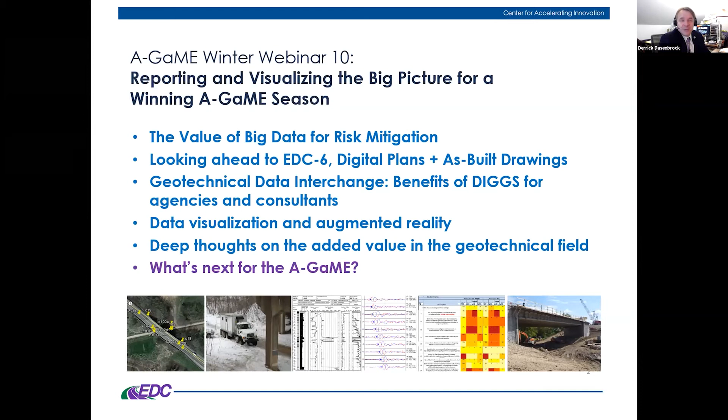Today we're going to be covering a number of interesting topics: the value of big data for risk mitigation, looking ahead to EDC-6, the Federal Highways initiative about digital plans and as-built drawings, Ohio's experience with the benefits of DIGGS for communication of geotechnical information, then a discussion of data visualization and augmented reality, and to the conclusion, some deep thoughts on added value of A-GaME technologies and other related items for us to consider and ponder as we move forward into the post-GaME season, which brings us to what's next for the A-GaME.

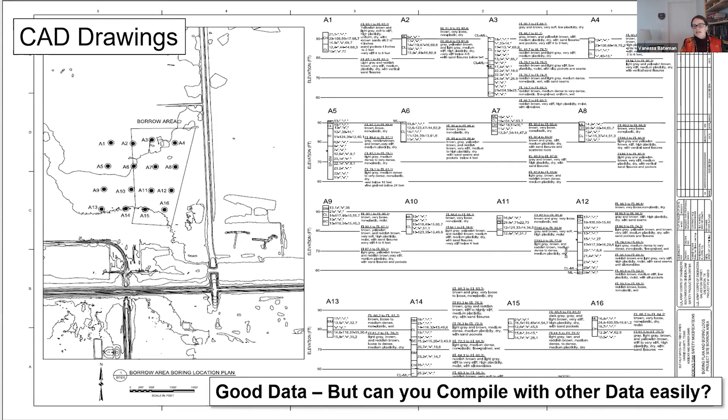So you've got a lot of good data. How can you compile it with other data? And that's one of the reasons why you need to be thinking about your data holistically and approaching this all as a whole. Just to kind of bring it home to something I know all of you have to deal with, how many borings do you have in your agency? Can you find them quickly, and how much does it cost to replace them?

Because I think what you'll find is it's a heck of a lot more expensive than you might actually originally consider. So doing things like organizing your data and having a boring log and lab database save money. It absolutely saves money. Now, it's always hard for us to get it from paper into the computer program, but what is the cost of actually not keeping this data and losing track of it?

And I know many of us have had the experience starting on a brand new project. It's a widening, it's a new bridge, it's a modification, in my case, to a lot of projects to a dam. The experience of not being able to find borings that you knew were there, right? That's a big risk to your project, and it's a financial risk to your project. You're not as responsive. You're not able to actually do some of the things that you need to do.

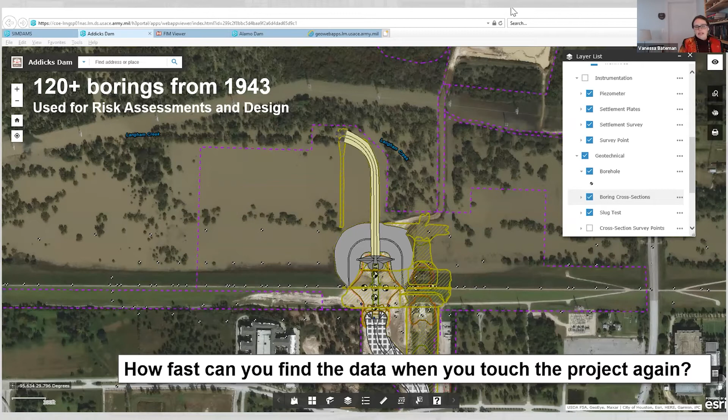And so just a quick example for replacement cost. This particular project, just the borings shown on this screen, it's not even all the borings on this project. If we were to have to replace all of the 120 plus borings shown on this screen that we drilled from 1943 to 1977, it would cost somewhere in the neighborhood of $495,900. That is a lot more money than you might think.

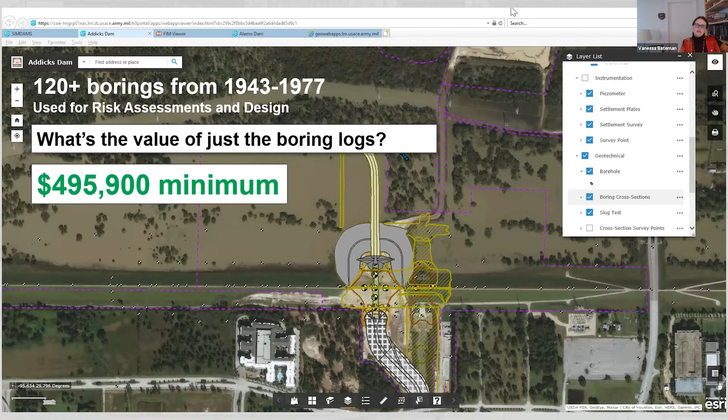Okay, so that's a dam, and you're thinking, oh, well, we may be from a transportation agency or whatnot. You guys do a whole lot of work on one of these individual projects. But so how many bridge foundations do you have within your state? If you're from an AE firm, how many bridge projects do you work on year after year? How many times do we widen these projects, and what's the condition of these foundations? This can be critical and really important information to have together before we get into a project.

Did you want to have to go redo all of that work again, right? We want to be able to get all of the data we have, bring it together, put it together with our design in our design process, because, right, how much time are we going to add to widening projects replacing data that maybe we already had?

One of the most key things you can do when working on data management and dealing with some of the data issues we have on our projects is simply organizing yourself, figuring out where you've put everything, and being able to put it into a system where you can make it work effectively for you.

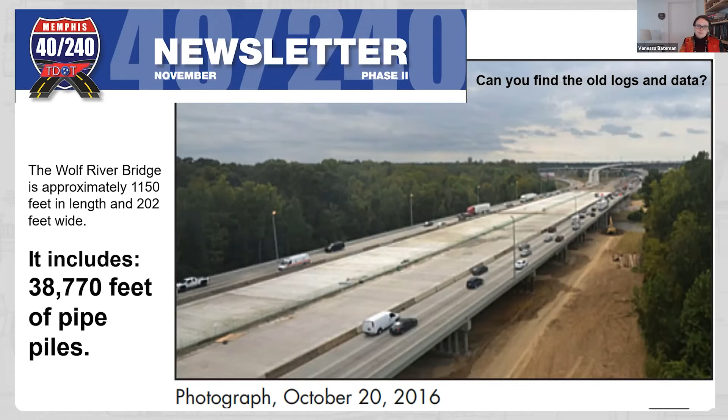And if you want to do a risk assessment of a project, it's always the same rule we use with computers, right? Garbage in, garbage out. If you don't have good data to back up your assertions, you're not necessarily going to have the best conclusions.

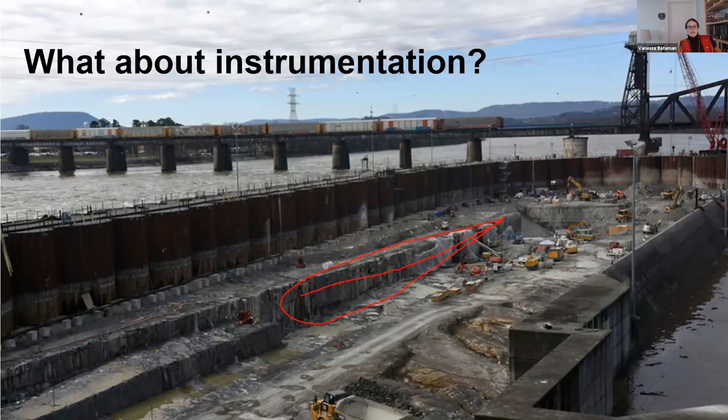Again, how fast can you get that instrumentation data in the middle of construction? As you can see, as this project has progressed, here's the actual rock wall, here is the cofferdam, we've got people standing right here. So this is not a situation, in terms of financial risk or life safety risk, where you want to have slowdowns in getting to your data.

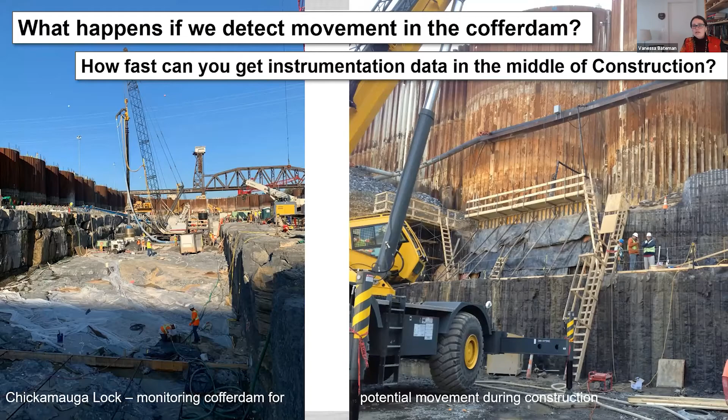The other question is, how fast can you check all of that against problematic geology or other construction data? It's all well and good just to have the instrumentation or just the boring logs, but can you correlate what's going on with your project with all of these things?

What we found on a number of ours is that we've needed to do that. We've got a lot of pieces and parts, a lot of things going on. We've got geology that may present specific kinds of risk. We've designed against those risks, we monitor against those risks. But if you do either of those things, you also need to make sure that when you're monitoring against those risks, everybody is actually getting the information communicated back out to them as well.

And I can tell you from experience, when something happens, even when it's small, you can really get people's attention anytime we're involving issues that incorporate life safety.

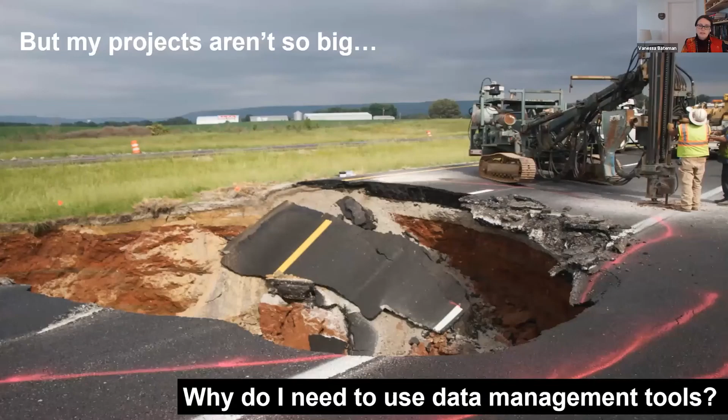Okay, so that's a lot. My projects aren't that big—why do I need to use all these data management tools? This is one of my projects from quite a while ago, a sinkhole in the middle of I-24.

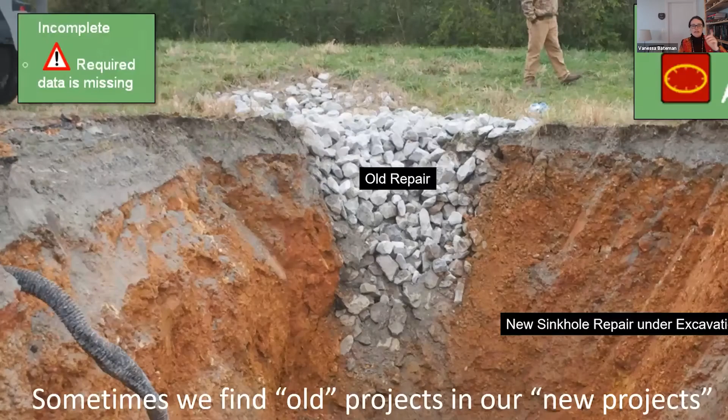Well, here's a picture of another one, and this is why. How many of you have found an old project inside a new project, gone out to do a sinkhole repair, and found the old one? Did anybody have an inventory? Did we know where this was located? It's fine, we're going to make a fix, but it would have told you something about the risk of that project ahead of time if you had realized there was an old sinkhole repair there.

You don't always know ahead of time if we're not tracking these things, or if we are, it's in a file folder somewhere in the back, out near the back dock, and nobody gets into that file folder again.

From another emergency management perspective, do you have a rockfall inventory? When was the last time maintenance was done on your slope? What are the risks to the traveling public? Do you have a program where you can say we're working on what sites we can get to, making good engineering judgments?

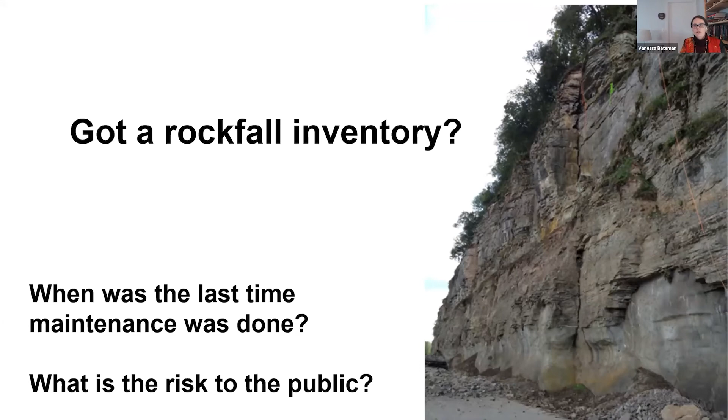Is your program defensible? If you don't have all of this stuff organized, haven't put it together, when you get into these kinds of maps, how do you pick the most effective site to repair?

This is actually the Ocoee River Gorge, the site that had the big failure in 2009. My question to you is, if you don't have this information at hand, how fast can you get that data in the event of an emergency? How do you know how quickly you need to respond to some of these things? This is the kind of information that can really help you a lot in a problem.

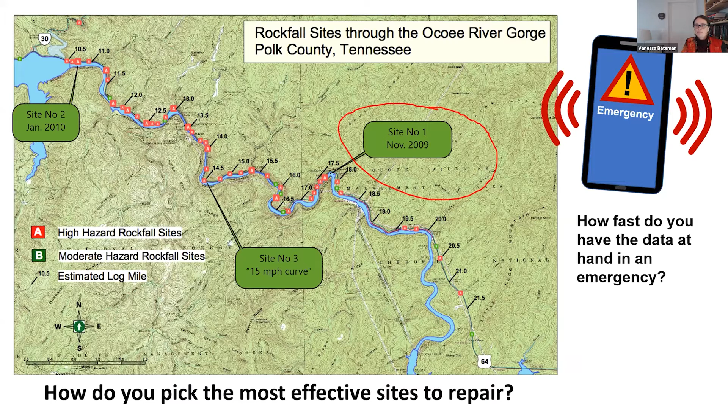Lots of our construction equipment comes with automated monitoring. Are we looking at that data? All too often, only parts of our organizations are, and this is hugely valuable information that we can use.

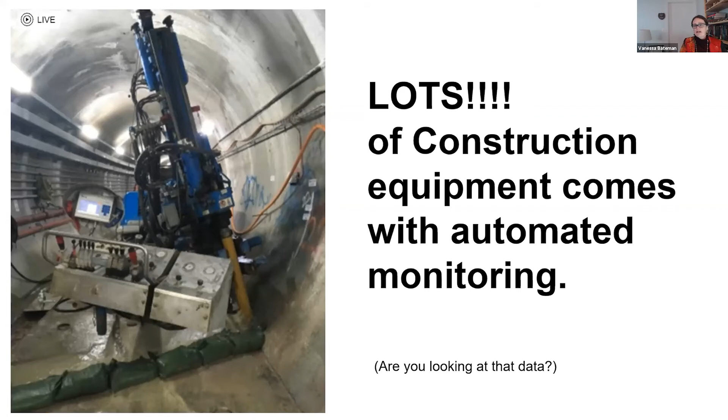Are you leveraging GIS? There's a lot of visualization tools, and Scott's going to show you some even cooler ones later in the presentation. You can do a lot with visualizing old plans.

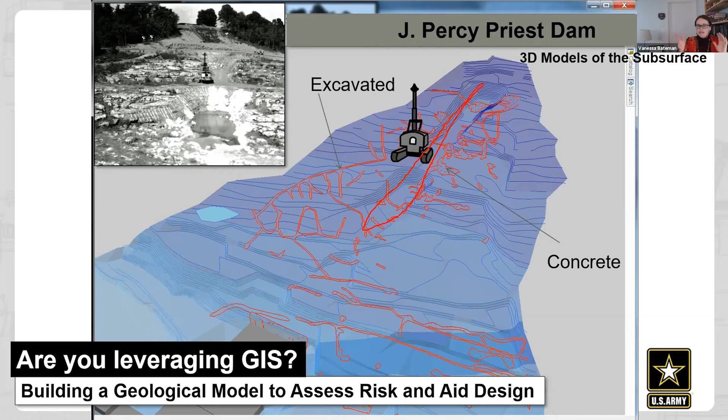Okay, so this sounds hard, right? If somebody starts talking about all this data management stuff, it's like, oh my gosh, it sounds so difficult. Well, let's talk about where we began here at the Corps of Engineers.

We really began with this in earnest at Wolf Creek Dam. It's 6 million acre feet, and we put a seepage barrier wall through the dam, 275 feet down into the karst foundation. This was a very high profile project for us, an absolute no-fail project.

This was one of the first times that we put together a really systemic data management system that we used all the way through construction. This is 980,000 square feet of a seepage barrier wall, right? This is a lot of information that we had.

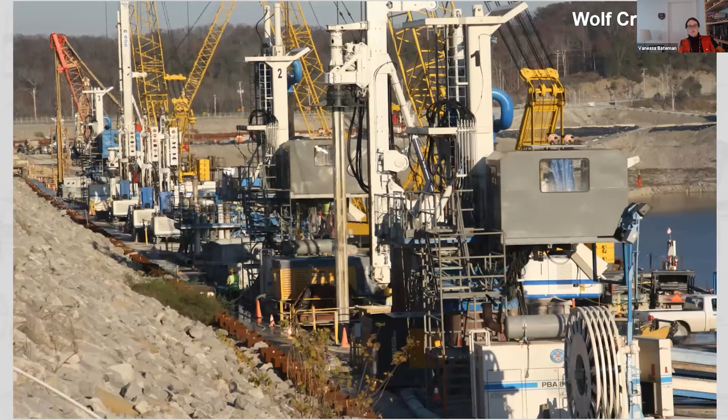Our work platform looked something like this. We had people working on a number of machines, doing a number of different things. We had instrumentation, and this is a very invasive procedure, so we wanted to make sure we were being very careful with what we were doing, and we were correlating all of the data that we got.

When we're doing this kind of thing, we need to be able to see what's going on with our instrumentation and what it means. To give you a scale, we had 71 million records on this project. If you printed out just the barrier wall reports, it would have been 144 feet high.

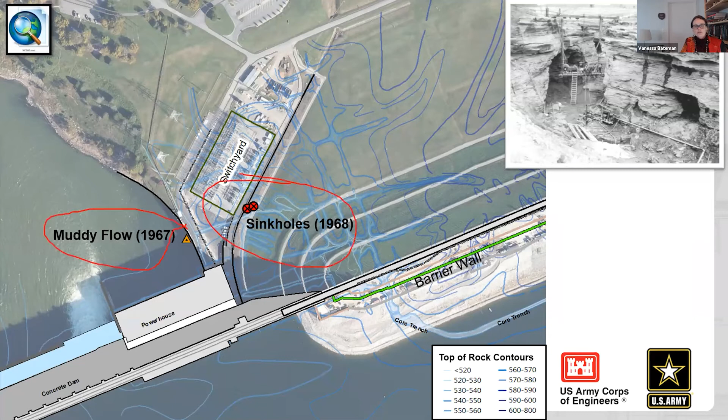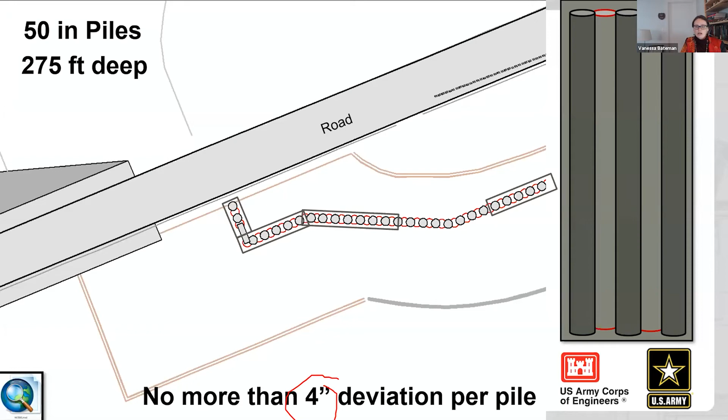So we really leveraged GIS with this, we leveraged databases with this. We looked at the underlying top of rock contours in relationship to where we were putting in the barrier wall, in relationship to old failure indicators, old seepage distress indicators from previous years. We looked at each individual pile. These 50-inch diameter piles had to go 275 feet in depth with approximately no more than 4 inches of deviation per pile.

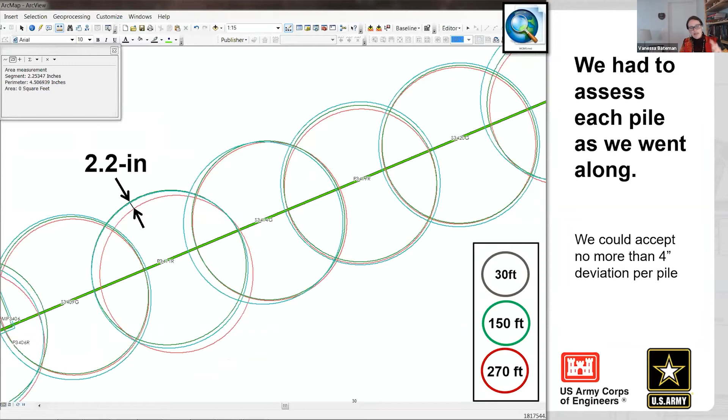So we leveraged our systems. We took information from the drilling equipment itself and put this together in GIS, where you could look at the sections at different places along that excavation, and you could see how much deviation you had right on the screen.

We did a lot of analysis with all of this. We did grouting on the project, looking at the deviation from the equipment, making sure that everything was meeting our specifications, and assessing the risk of what we were doing every step of the way. So this was hugely helpful to us.

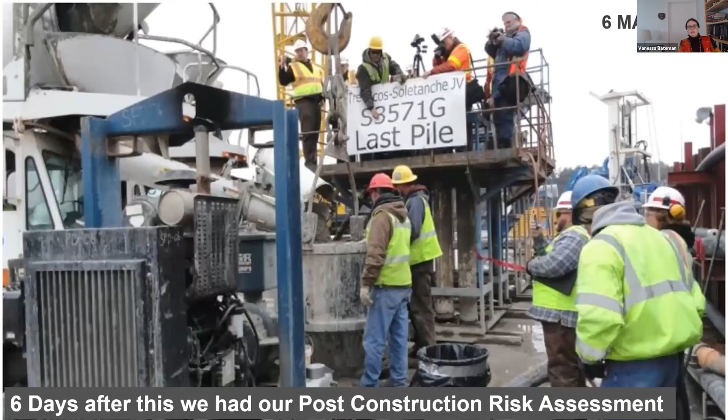Lastly, it really helped us a lot because at the end, we had to do a post-construction risk assessment to make a decision about when we could raise the pool again at Wolf Creek. It had been down for about 7 years at this point. We had to do that 6 days after we completed the last pile. If you don't have a data management system, if you haven't been doing these kinds of things ahead of time, there's no way you can compile that information and effectively present it within that time frame.

We've done a lot of this at Mosul Dam, right? This was an installation of a grout curtain in an anhydrite and gypsum foundation, so you can imagine that gets to be a little bit of fun. If you've been to a previous presentation, you've probably heard a little bit about this from one of my colleagues. A lot of grout holes, a lot of data, a lot of grout, and a lot of instruments.

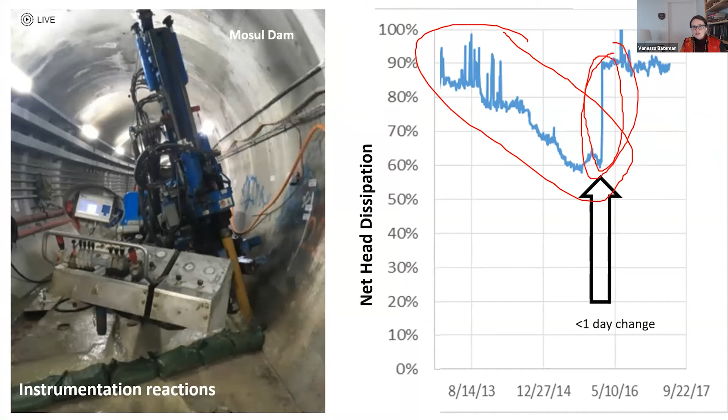We actually had about 500 instruments out at the site, so quite a bit. We had automated grout monitoring in the gallery itself, and we needed to be able to know what's going on with the drill, what's going on with the grouting itself, and what's going on with the instrumentation. Because as soon as you see a jump like this, and it's that immediate, you're going to really get people worked up, and everybody's going to want to know what's going on with your project right now.

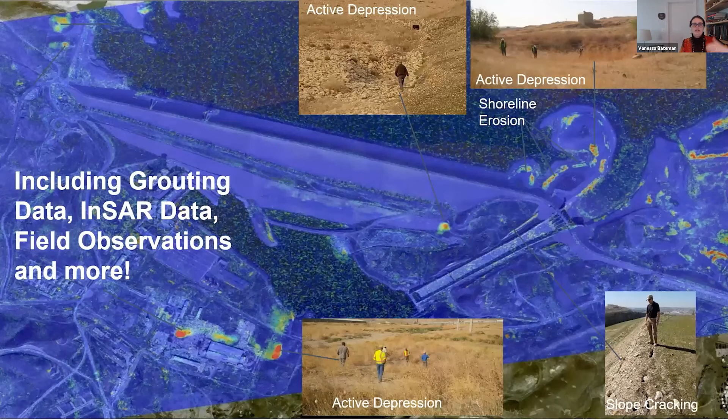Imagine getting data from 500 and something instruments, including all of the grouting data, the InSAR data, field observations, and more, and not organizing this, right? What happens at that point is you're overwhelmed by the tidal wave. You're absolutely overwhelmed, and it becomes impossible to keep up with everything.

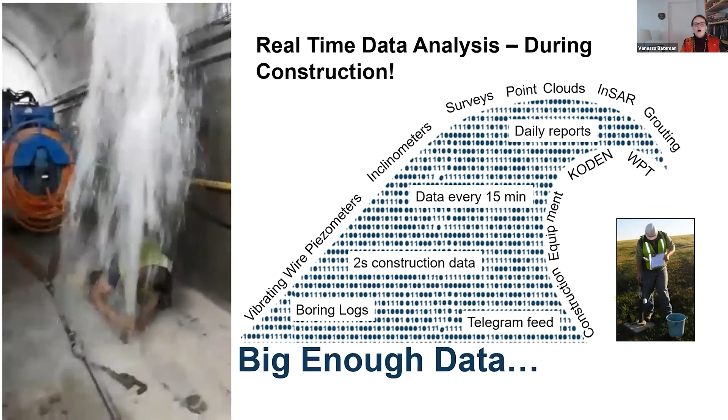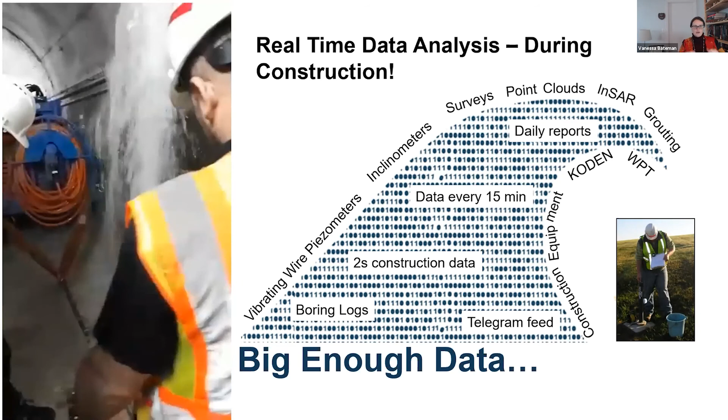I've got a quick little video here. This is actually some water coming up out of the foundation. He's trying to cut it off there. But this is what it feels like when you're coming into these very large projects and you haven't gotten everything really put together, right? You're just trying to get control of the water, trying to deal with all the data that's coming, the point clouds, again, all of this construction data.

And hey, we got it. So we're ready to roll. Okay, so it's a lot of data.

My point really is, as you're trying to deal with these things, the hardest part, honestly, is getting it into the database in the first place. Because once you've got it into a database of some kind, whether it's a spatial database, a SQL database, or an Oracle database, whatever it is, whatever tool you're using, you can leverage that in ways that really you never could have done if we were still back in the days of pen and paper.

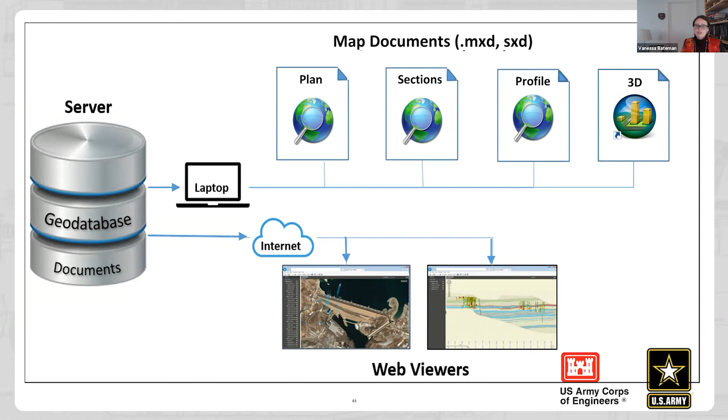What we did is we had a server side situation, we had maps and cross sections we delivered to people, and then we also delivered web viewers to make it easy for folks to get to the data. So we had navigation tools, we could get around on our map, we had search, measuring, and some annotation, which actually helped, and printing.

And then we could click on, like in this case, this is where all of the pictures were. They're geolocated. You just click on the picture, you could bring it up, you could actually share that easily with others, and that turned out to be extremely important as we were dealing with a very dynamic site and dealing with folks spread from Iraq to Alaska.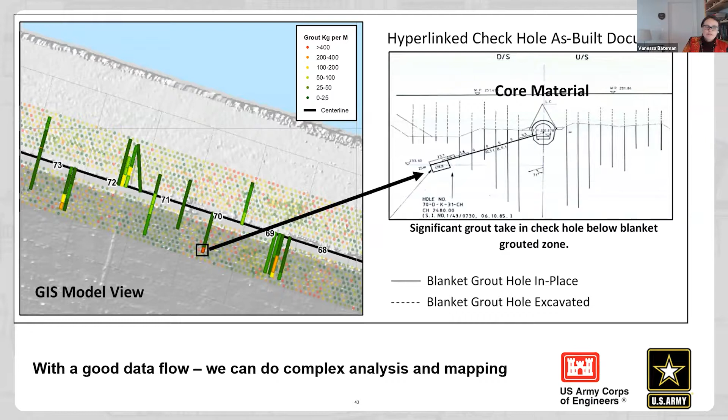It allowed us to do some more advanced statistical analyses, right? This kind of map is very easy to produce once you have everything into a database. It's extremely difficult to produce if you're trying to go through 10,000 something grouting records by hand.

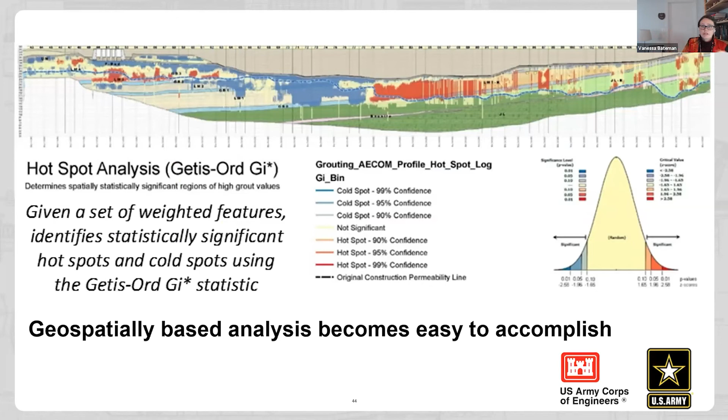So, and again, we also put things in kind of a cross-section GIS where we could say, okay, let's show all of our grouting things going on beneath the dam. Red is more grout take, green is less. We can compare that with the historical data, right? Well, I'll show you that in just a minute, but we could actually click on the grout stages themselves and get some very detailed data about what was happening.

But the other thing that we could do was actually compare it to some of our historical data. So this is some of the water pressure tests that were performed early on in the project, and we could assess things about the geology, because it's a very dynamic system, what was happening in the geology from what we knew from original construction to what changes we saw when we got out to the project and were doing the more current grouting project.

And then we looked at things like cavities from historical logs, and you can easily just turn things on and off, right? You can say, okay, this is what I want to look at. No, I want to look at the pressure test. No, I want to look at the cavities, and it's all very easy to do. And again, we had to share this information across about 11 time zones. You just simply cannot do that if you are dependent upon paper or even just email.

And then again, you can leverage all of this to be able to see and visualize a lot more into the future. Putting things in 3D on a 2D screen is great. Man, 3D in 3D space is one of the most amazing things I've seen recently developing as tools that we can use. So there's so much that you can do, but all of it comes from, I have my data, I organized it, I put it into a database, and then I was able to leverage all of these fabulous computer tools to do analyses, figure out what's going on, figure out what the risks are of my project, and then go about intelligently addressing them.

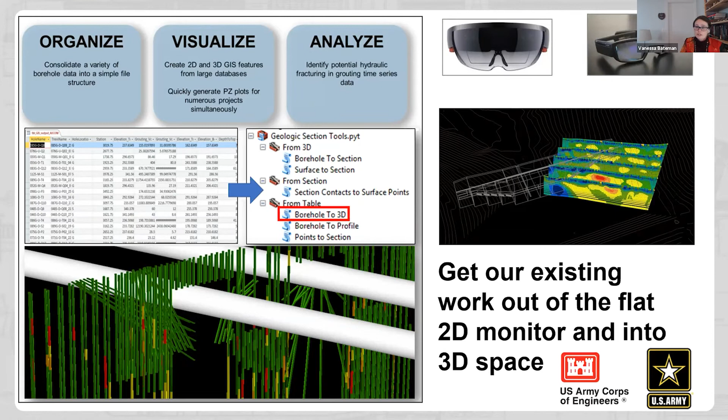And then we just developed a schema, the database structure, by working on actual projects, figuring out what we needed. So you don't have to start with this idea that everything has to be perfect before you can actually move. Get started. Start building these things a piece at a time. You'll learn the lessons you need to know, and you can apply them more and more as you go along. And you'll find that this feedback loop actually really helps you quite a lot.

And as the years have gone on, we've added more and more to our various information management systems. And one of the biggest things that we're doing in the Corps right now is just trying to make sure that all of these pieces and parts can talk to each other, because it really helps build our capacity. So this is just an example of some of the inundation mapping that we have available on a number of these projects. You can imagine if you are a dam owner, where you're going to get inundation in a particular size storm is hugely important for assessing risk.

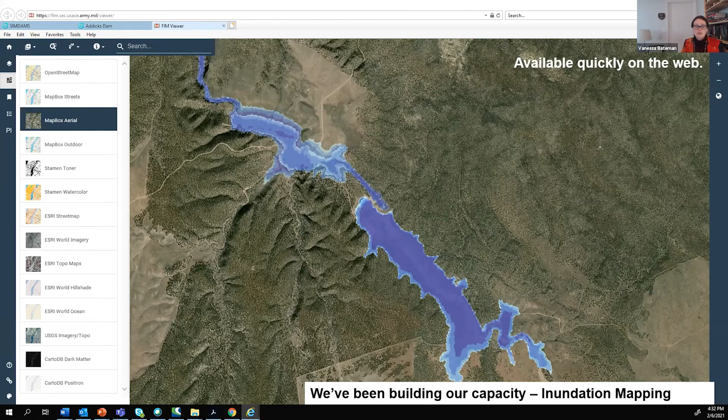We can take them into our models and say, okay, well, here's all this other stuff going on in our project, right? Again, we've got the little pictures here for photographs. We have a number of different features on this project, and I can click on the features. So here, I'm just going to take a quick look at a spillway. This is just some basic information about it, but I click on that, and boom, I've got the plan sheets.

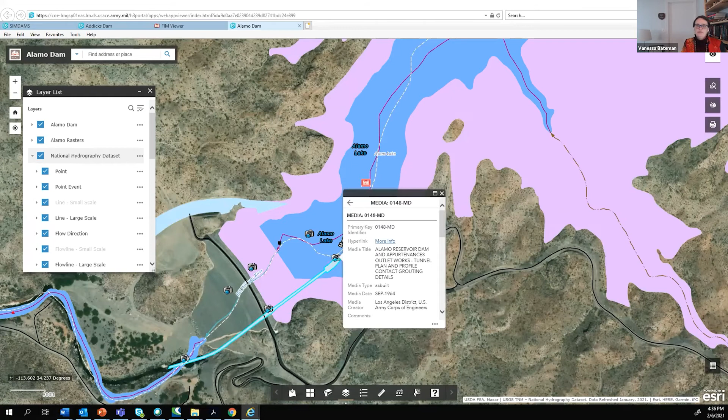So now, again, everybody who needs to see this data can see it, and can see it rather quickly. So we don't have to depend on, did I send John over to such and such site to go check to see if they have the plan sheets? We've got them, at least on some of our projects, certainly not all, immediately available.

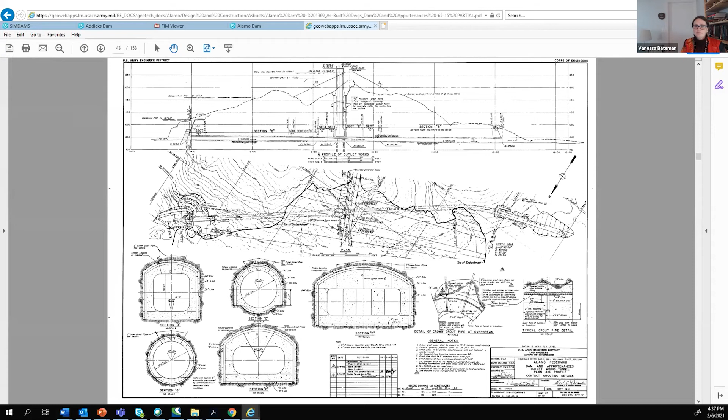So, just a couple of points here at the end before we get to questions. Some basic lessons learned on this, really. You do need a data management system, not just a database. So there's a lot of different kinds of data, right? There are things that are communicated better on paper or in a PDF or on a plan sheet. Other things you really do need to be putting into a database. You need your data accessible at the speed of relevance.

So in the case that we were on Wolf Creek, we had one time where we had a showing of slurry in our headwater, and that was a really big deal because that could have indicated a major problem in the excavation. We were able to assemble the data very, very quickly in 3D space, put it in our CAD program, look at it in our GIS, and say, okay, that's not likely the problem.

We were able to troubleshoot exactly what happened based on all of the project data and having it right there, right then. Because if you don't have it right there, right then, sometimes you may be guessing. Other things we needed to look at on a much more extended time scale, and we did. So you've got to think about how fast you need your data.

Telemetry and accurate information can be crucial, right? If you've put in instrumentation, but you cannot read it fast enough to know that you need to do something because that instrumentation is giving you a problematic reading, you definitely want to be thinking about that. And you also want accurate information, right? You don't want to set your thresholds too low or have a situation where you're like, well, I kind of know. You need to understand the accuracy of your data and what it can tell you.

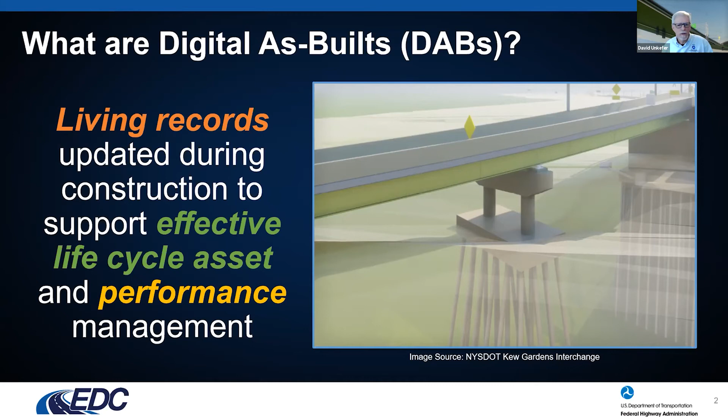And then it's going to be updated during construction to create this as-built, so that as we hand off the information post-construction to operations and management and asset management, it's accurate, and it will allow them to do their job better. And I couldn't have asked for a better intro than some of the information that Vanessa shared.

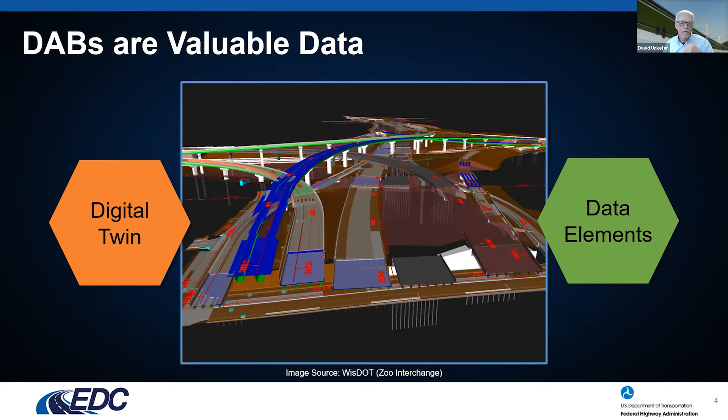In addition, there's the probability that they will be looking for certain aspects of our asset information for automated vehicles, to help them navigate, as a backup. So there's just so many things that we are on the cusp of and ready to do. And really, I think for this audience, the point is that you're not alone. Other disciplines are collecting their data. They're trying to learn how to manage their data. And I will talk about that in just a second.

But the types of data that might be included, I think it's kind of an open opportunity. It could be unlimited, depending on what's important to an agency. But these are the kind of things that either we currently gather or we expect in the near term. If you'll notice on the right side, I think it's obvious we want geometrics, the alignments of the road and so forth, in 3 dimensions if possible.

And then what we're currently not getting, for instance, if you look on the left, is utilities and subsurface. And so we cover that up, and then we spend a lot of money to find them again. Sometimes we find them with equipment in a way we wish we hadn't.

It's just an incredible opportunity. And I added geotech after some conversations with Derrick and Ben on the bottom left, because I believe that's yet another piece of data that is just invaluable going forward as part of asset management. So

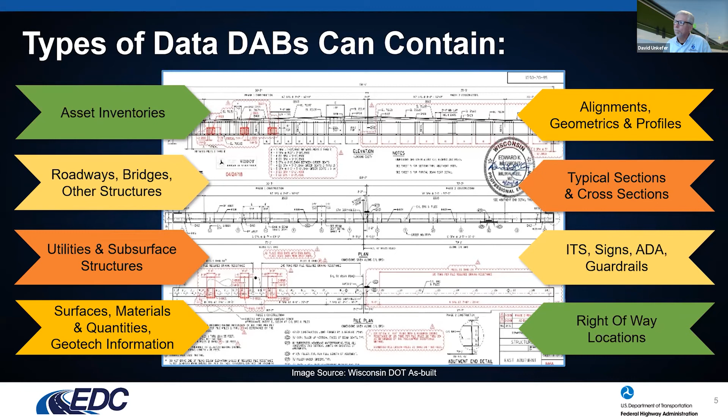I wanted to try to use a graphic to, again, make it a little more, picture worth 1,000 words, right? So currently on the left, we collect 2D PDF or plan sheets, and we mark them up with unintelligent markups, just a simple PDF that can't be queried or searched. They're paper or image based.

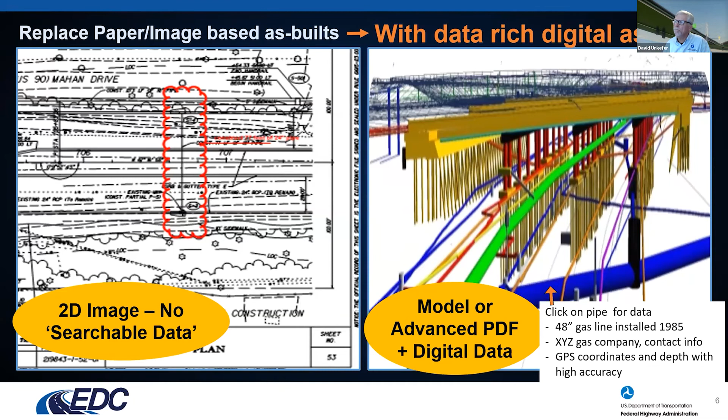Where we're trying to move is data-rich digital as-builts that are represented on the right, where hopefully you would have a 3D design model that would incorporate, as you can see in this picture, both above the surface and subsurface information, and that you could click on that information or click on those graphics in order to get more detailed data and visualize that in a way that helps make decisions, and even during construction, allows for clash detection and things of that nature. So that's kind of the what of digital as-built and some aspects of digital delivery.

The why is, I think, somewhat intuitive, but really that ready access to data, the opportunities are probably unlimited as to what we can do when we have data that we trust and we can visualize it. I think we're going to see enhanced safety, which is very important to us. Just in the safety alone from not having to go out and recollect the data over and over again and put people in harm's way, particularly in the construction field where I work.

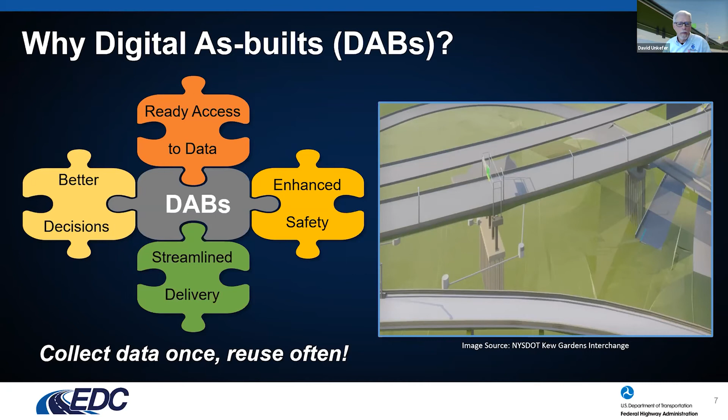Streamlined delivery, we're expecting that digital information is going to allow us to streamline workflows. We'll do business differently because now data can be passed more cleanly between the places that need that information during design, construction, and contracting. And then, we'll make better decisions, data-driven decisions.

More detail that might resonate with DOT folks: that digital delivery process that creates a model during design and associates with it all the information needed to build the project, if we carry that into construction management, is allowing us to automate and make decisions faster, much as was mentioned earlier with some of your geotechnical data.

And then if we pass that data into operations and maintenance, it's used there as well, improving asset management functions, and then ultimately improving project scoping for the next time, because instead of having to search for all this information and try to pull it together, if we are organized through a data governance process, then we will be able to make future decisions with that information when we come to scoping again, and actually even through any of this process. So really, digital as-built is the end of a whole digital delivery process.

And one of the things that's happening now that I want to mention, because it maybe connects more with the geotech work that you do early on, is that several states are using the 3D model as their contract document that passes to the contractor and into construction.

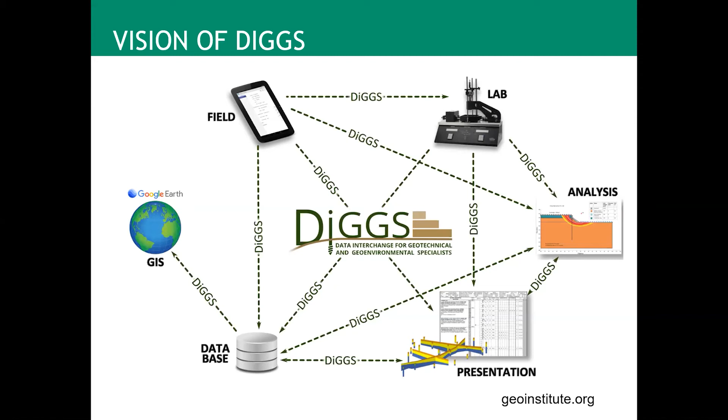So right now at the Ohio DOT, 90% of our data is being reported in GINT. That's going to probably change in the future, and I'll talk about that later. But as of right now, in January of 2021, we're seeing 90+% is in GINT.

So because of that, our first step was to look at, okay, we've got all these GINT files, and again, we manage everything project by project. We have project files for each individual GINT database for each project.

We contracted with Data Forensics and looked to create a conversion tool so that we could take our GINT files and convert those over to DiGGS, because then you have an XML that would be sort of the first step of being able to transfer data.

The second step of the process was, okay, if I'm given an XML file, how can I convert that over to GINT? That was sort of the second step, more or less making a round trip - the idea that you then can either accept an XML file from, let's say, a consultant that's using a different type of software for their reporting, or if you need to exchange data with them, you can also do it. So that way you've completed the round trip, so to speak.

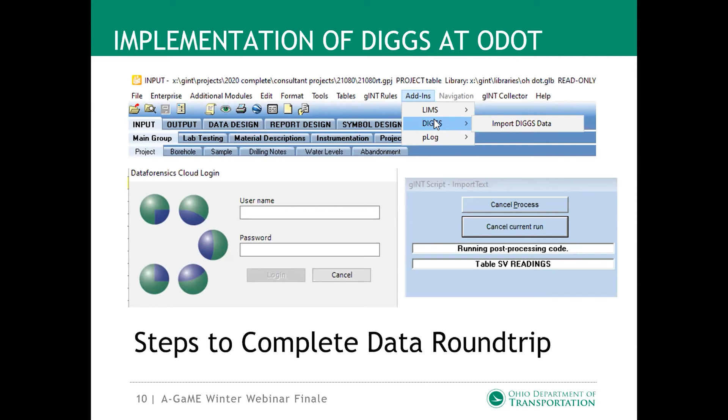The round trip, basically taking the XML back to, in our case, a GINT file, takes about the same amount of time. The only difference is that we do it within GINT, and it does require connecting to the Data Forensics cloud. That can obviously complicate things from an IT standpoint, but it again only takes about 2 or 3 minutes. And then you're able to accept an XML file and convert it over to GINT, which is still our standard within the Ohio DOT for reporting.

What we found as we've converted files is that from a standpoint of data, we're able to transfer it successfully. Whether you're talking about gradation, Atterbergs, data transfers without issue. Where we are having problems is with regards to text.

From a standpoint of, we have consultants that, because of the flexibility of GINT, have customized our library, or they choose to enter the data a little differently, or in some cases we have consultants using GINT for their invoicing. As a result of those changes and modifications they make regarding text, we sometimes don't get all the text across. If you were looking at a boring log prior to converting versus a boring log at the end, the data would be there, but sometimes the text, some notes, things like that may not carry over. We've been working with Data Forensics to try to optimize that as we go forward.

So far since 2019, we've converted over 450 projects, and that's a combination of data that we're generating internally as well as consultant generated data. So now we've got all these files. Well, the question becomes, what are you going to do with them?

For us, that began with looking at probably our biggest asset from a dollar standpoint, our historic geotechnical information. Vanessa touched on the cost of recreating it for a single project. Back in 2004, a study found that if ODOT lost all that data stored in a warehouse, it would cost about $500 million to recreate. Today, with inflation and another 15 years of projects, it's probably closer to $700 million.

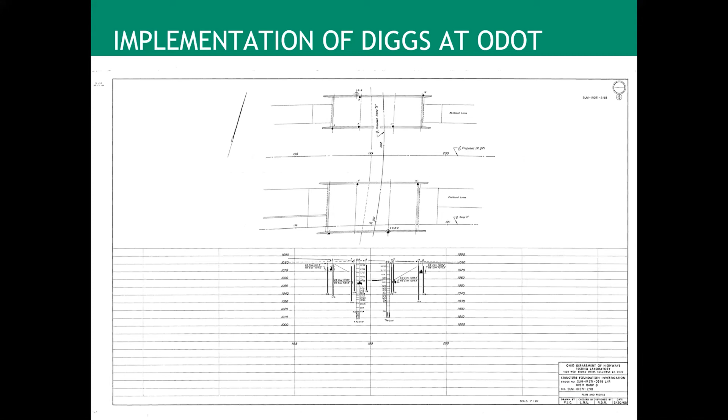Here's an example of a 1965 plan sheet, and this is that same sheet in ArcPro, overlaid on an aerial, with the red points showing the boring locations. This process can take, for a large project, in excess of a day. For a smaller project, the average ends up being 70 minutes, always at least 25 or 30 minutes even with just a couple of borings.

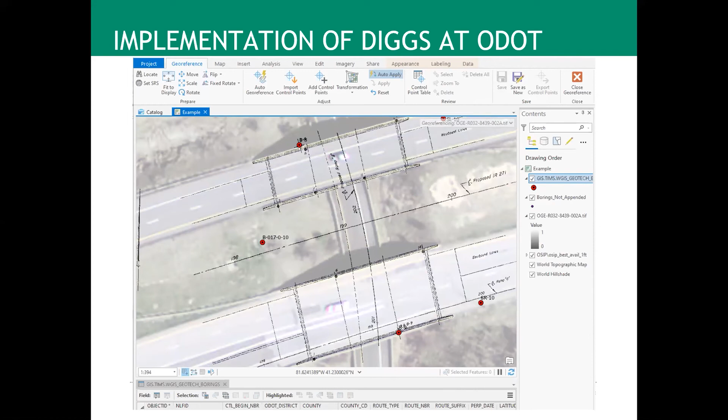So we needed to find a solution going forward, and for us, DIGGS presented an opportunity. Our tech services group, with no geotechnical background, took a look at the XML and created a Python script to extract some ID and geolocation data from the XML file.

Some examples of that extracted data include project information, county, route, mile marker, your internal tracking number like ODOT has, and I'm sure every DOT does, boring ID, and coordinates in lat-long. Again, information that could be easily extracted.

Here are some examples of that data within the XML. If you look at an XML it's tough to identify much in there, but if you can narrow it down to just the data you're seeking, you can find information like the county, the boring ID, the coordinates, and the top of the boring if that's been surveyed.

Here's an example of our transportation information mapping system, a planning tool used by ODOT for all disciplines. From a geotech standpoint, it has our retaining wall inventory information, geohazards, landslides, rock slopes, abandoned underground mines, and all 270,000 points of our historic geotechnical information and data.

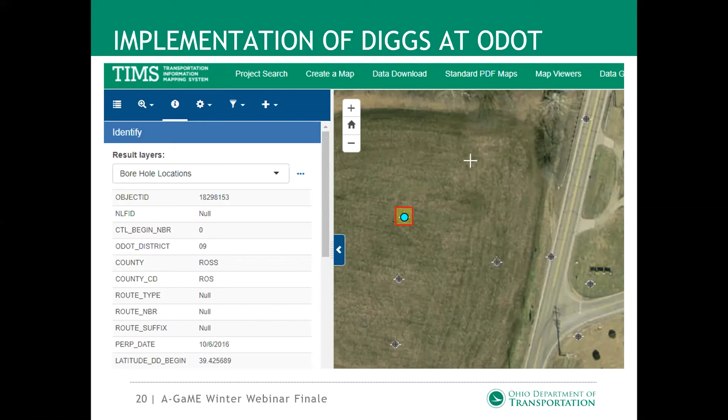In this example, I'm in Ross County, southern central Ohio, on a project that hadn't been built yet, so the aerial doesn't show the eventual construction. I've selected a point, and in the past we would just show the boring log and perhaps some two-dimensional drawings, as Vanessa or David mentioned. But now, in addition to all of that, you also have the ability to retrieve the DIGGS file in XML format, and from there use that data in a variety of ways depending on how you want to use it.

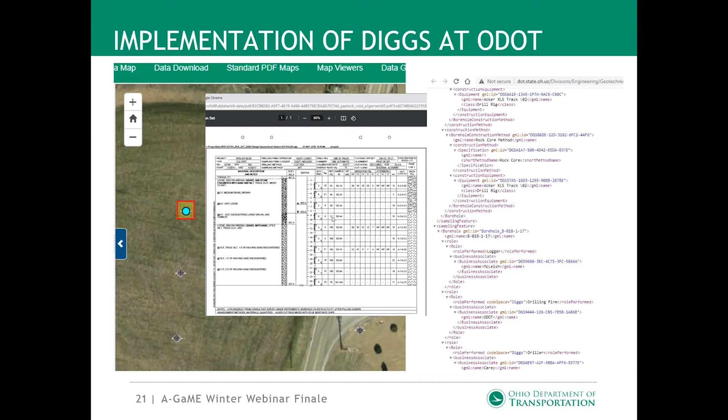So for us, that was the first step: taking our data and being able to show a benefit from DIGGS. Now, what we're able to do is save 55 to 60 minutes per project getting that data into our GIS platform, and ODOT averages around 200 projects a year between us and our consultants. That's a pretty big savings, upwards of 200 hours of labor. Going forward, as we move to more of an enterprise setup rather than project by project, there's opportunity to bring that number down even further, so it will continue to improve.

Looking at where DIGGS is going at Ohio DOT, the first issue we'll run into is that while we're at 90% statewide with us and our consultants using GINT, we see a rapid move coming toward OpenGround. But Ohio DOT might not be as nimble in moving to OpenGround as quickly as our consultants. So in the next 18 months, we could end up with 50% of our data in OpenGround and 50% in GINT, with Ohio DOT internally generating most of the GINT data and consultants having moved to OpenGround. That's where DIGGS becomes critical. We've had consultants ask us, we're thinking about moving to OpenGround, what are we supposed to do? Our response is: as long as you can produce a DIGGS-compatible XML file, we're perfectly satisfied.

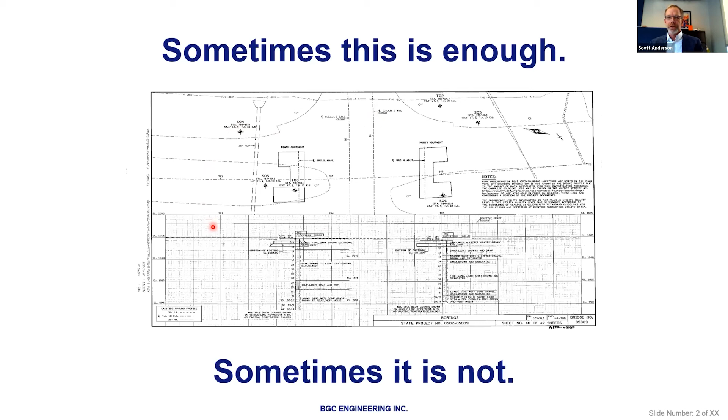Well, part of the problem here is that this stick log is represented underneath the abutment at this location here. This stick log is actually this boring that's up here. And there's other holes that are shown in the plan view that are cone penetrometer soundings that aren't reflected in this at all. So this clearly is not an accurate representation of what's really going on at this location. So comfortable is not always best.

This might make you feel a little uncomfortable because you've not seen it before, but this is me looking through a HoloLens at an embankment and a cut through a ridge. And my gaze is focused right now at this place called elevation 541.5 on the hillside there. But realistically, what I'm seeing is the CAD template for the embankment construction and the roadway cut.

And I'm seeing the geophysics, the seismic refraction that was conducted along the spine of the ridge before this project was constructed, and also a boring that was drilled from the spine of the ridge that shows me things like SPT N-values. The green here is the percent recovery. And in 3 core runs, there actually was a measurable RQD. So that's shown in kind of the red color right here.

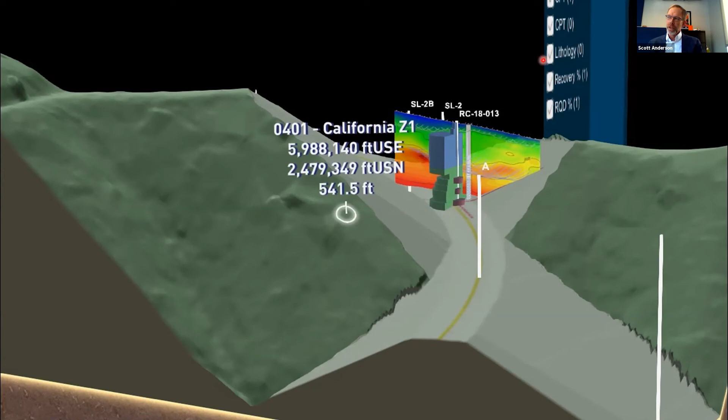If I cast my gaze over to that spot, the actual values would show up. This is not a cartoon, but rather a digital twin of the project as built, as David was talking about, and is the data that are captured for this project. In the background, you see a bit of a legend. I could turn on and off some of these things, but these data are all available for this alignment. The ground is green here, not because it's a pretty color, but because it's the geologic unit. So that tells me something about that material as well.

So how does this happen? Well, I'm going to tell you a little example right now. This has all, again, happened in the time that we've been promoting the A-GaME technologies. But the way this happens today is that somebody goes to the field like this and they see something interesting that they'd like to share with others and communicate. So they pull out their latest iPhone or iPad Pro, and using the LiDAR scanner that's on that piece of standard equipment, they start scanning the outcrop.

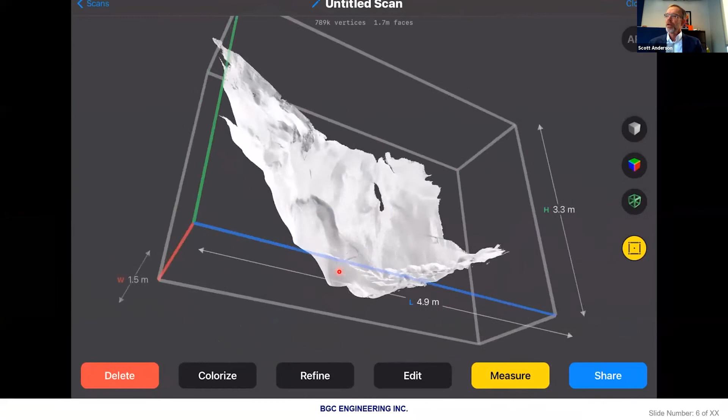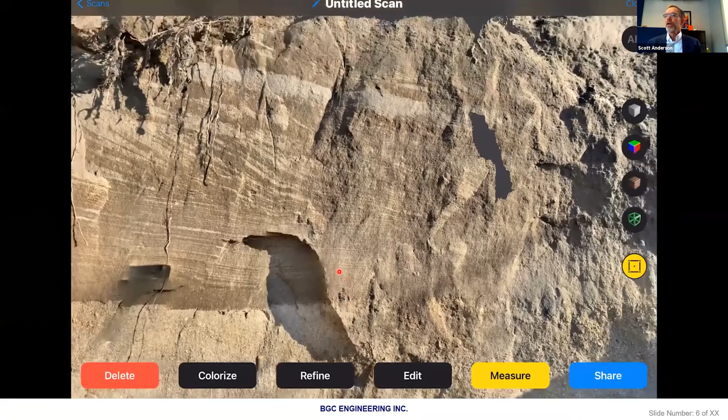They get a 3D surface like this. Alone it is pretty interesting, but it's also been taking a picture, and that's called texturing. So in this case, the photograph is the texture that's put on that 3D model, and that's what you're seeing right here. So you can zoom in on it and look at it in this way. You can play with it on your iPad like this gentleman's doing here. But moreover, you can upload it right to the cloud.

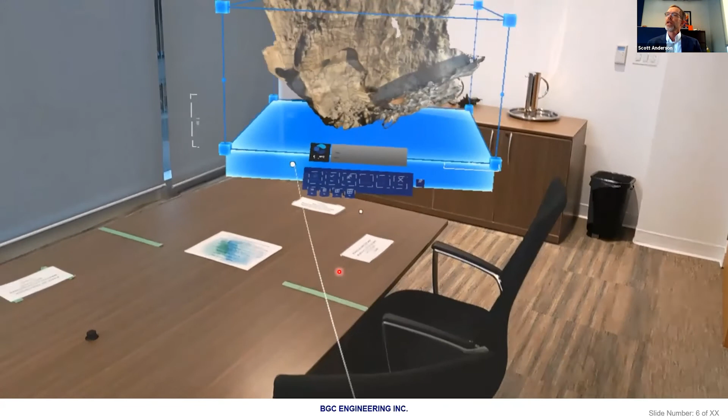And they can drag this hologram around, put it in the right spot, but it doesn't actually have to be moved that much because you can walk around it. And because you can see things too while wearing these lenses, you can avoid the conference table there, and you can start looking at it. Now, as these folks are looking at it, you'll see some other things in light purple in the image there. These are people that are thousands of miles away in different time zones, and they're actually looking at the same 3D representation of that surface as the folks in this conference room are.

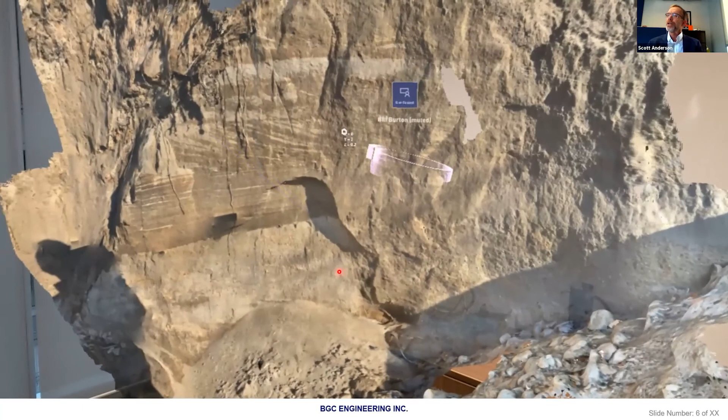And there's directional audio on these devices now, such that when somebody on the left of you is talking about what they're seeing, they sound like they're right to your left, and they're pointing. You can see what they're pointing at with their hands. You can talk about whether there is or isn't offset on that bed of sand right there. And when it's all said and done, you've got a very clear understanding of what's going on. If you wanted to take a 2D photograph and upload it somewhere, you could do that, but there's no need anymore.

This is a little bit different of an image, and it's also a fun one for me to share with you today because this is from the very first EDC-5 summit in Baltimore. And it's 2 gentlemen, at least one gentleman, standing below ground looking at a bridge site.

And they're looking at data that are textured as well. There are certain objects here, and the objects are cone penetrometer soundings, piles, seismic refraction work, and SPTs. And the texturing here is not texturing of the ground like the image in the last things we looked at, but rather it's a data value. It's something that we measured from the ground, but it's still applying a texture to an object.

And there's lots of fertile ground for thinking of the best ways we can do this in the future. But that's what these folks are seeing. The image isn't of the highest quality because it's actually a person sticking an iPhone up between their cheek and the lens and taking a picture through the lens. So it's exactly what you would see if you were wearing these things.

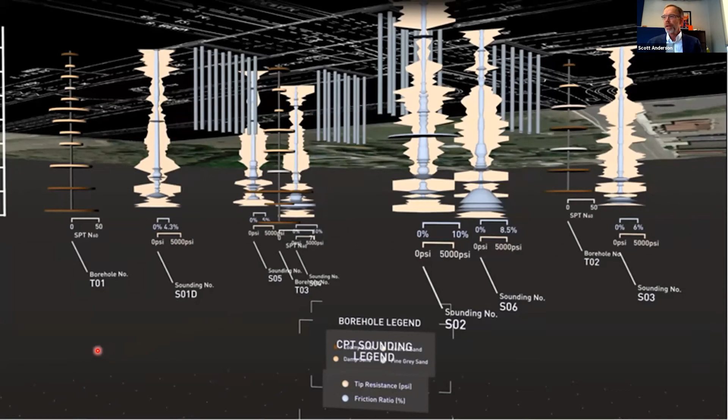These data right here are from the great state of Ohio, and as such, they're available in a DIGGS format. And so we're looking at data here that includes seismic refraction, electrical resistivity, SPT N values, recovery, and RQDs again. It's possible now that these are data-driven processes too, so that it doesn't take long. It takes a little longer than Steve was talking about in terms of populating these logs from gINT logs into this visualization, but it's on the same kind of order of magnitude.

Another really interesting thing about looking at data in this style is that, you've never seen it like this before, so it looks a little blurry, but you're seeing electrical resistivity results in the same view and time as you're seeing seismic refraction. In other words, you get for the first time the ability to evaluate something that has a low resistivity and a high velocity, or vice versa, or in contrast. And it really gives you new ways to interpret the data.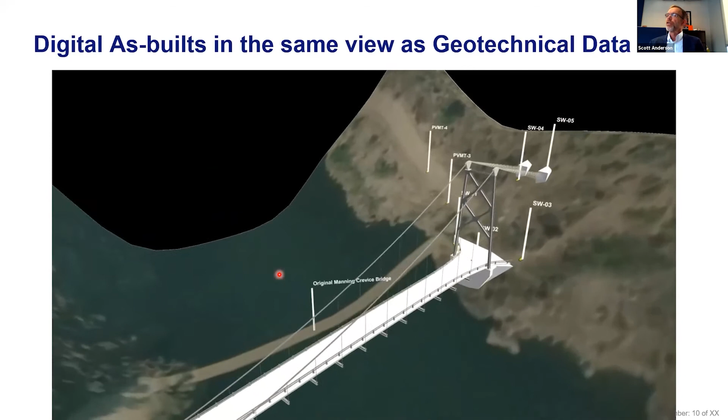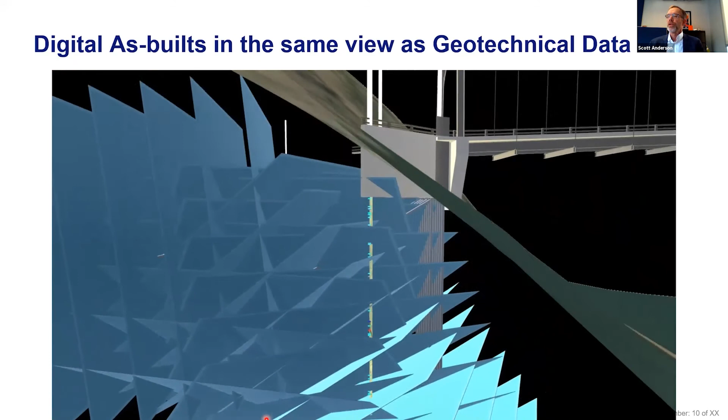So that was kind of DIGS, and I want to talk a little bit about the digital as-built idea and another A-GaME technology, the optical televiewer. This is a project, and I think this little video clip will someday be on the FHWA site, of a Manning Crevice Bridge as it was built. At each one of these white flags over here, there is a boring, and each boring had an optical televiewer for its full depth. Because this is a cute little movie, we're just going to look at one of these, and we'll go underground, and we'll see that log. We'll also see the interpretations that the engineers and geologists made at the time this bridge was being designed, and that is that there's 3 joint sets, or 4 perhaps, that were controlling the structure there.

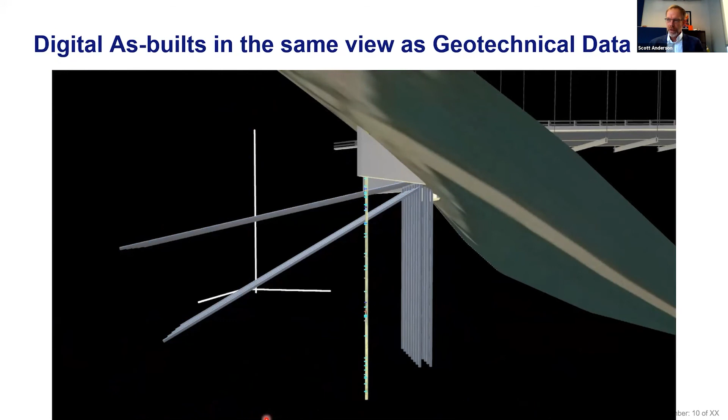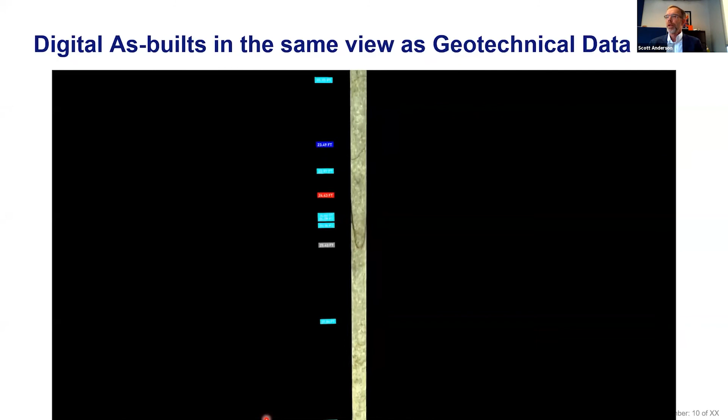And then this log, you just see it at like stick level. Normally you'd go right up close to that and you'd get to see this in a close way. But again, it's a movie, so we're pulling it out for you and bringing it forward. And you can look at this synthetic core, but this is actually reconstructed from what was filmed inside the borehole at true scale. And you can move this up and down so that each foot is a foot.

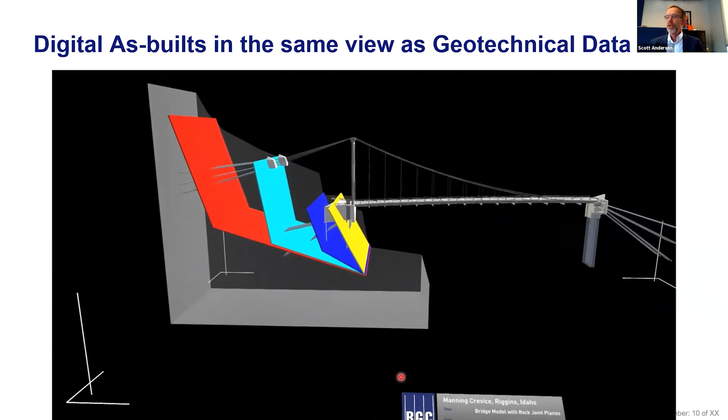If you had this on in your office, it would project all the way up through the ceiling and all the way down through the floor, and you could move yourself up and down the core to look at how open some of these discontinuities are and what values you're assigning to them and what kind of performance you expect out of them. And that's the kind of thing that is available today. Now the core is going back in the hole here, and these 4 different colored planes that are being shown are the interpretations. So right here, you have data, you have interpretations, and you have an as-built drawing of the bridge site.

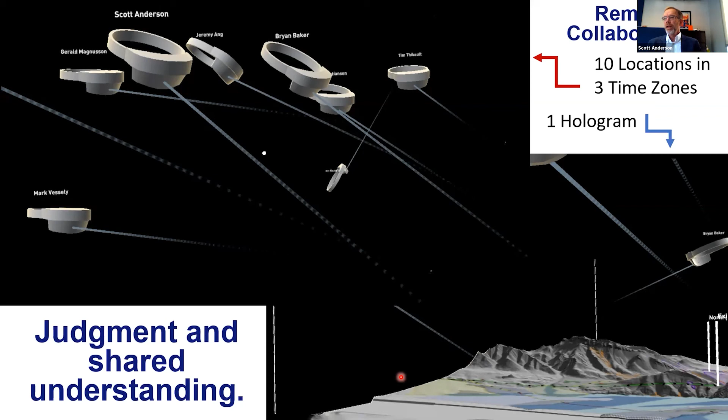It's what we call a tabletop model. Everything on it is a GIS layer. So anything that goes on a GIS can be visualized in this platform. And it's one of the easiest ways to move data into augmented reality type space. You get several people. The person in the middle there made what's known as a Zoom mistake, leaving their camera on and getting up and leaving. Once again, there is a person way off to the right looking at things their own way, and it will bring their judgment and understanding together with those on the left, and will really help in getting a shared understanding.

And my point through all of this is that once there is a shared understanding, there really is a great degree of risk mitigation, because communication is key to all of this. The A-GaME technologies are all about getting data out of the ground, but just like anything else, it doesn't matter how brilliant you are. If you can't explain it, it's not of any value. So this is really about getting the value from all of the A-GaME technologies, getting it shared, getting a common understanding.

I was going to close with the Hollywood ending to my story here today: if you're not doing this now, it's because you don't want to. It's not because you can't. None of this is science fiction. None of this is in the future. All of this is being done. But some of the prior presentations today reminded me of something that's very real and that I have experienced myself.

And that is, there is no place for this in the workflow. And this is a challenge. You might find this very exciting too, but you might be asking the question already, who does this and where does it fit in? And indeed, that is one of the challenges that we face together in moving forward.

Just in closing, again, I'd say that the geotechnical professionals are unique in our project development business in that we are the ones who take 3D information and make it 2D. We have to ask ourselves if that's really the role we want in the future. Thanks a lot.

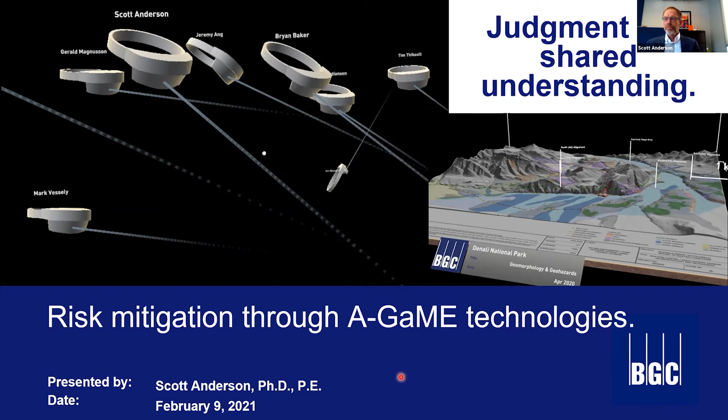And it goes to Derrick, I think. Yep, thanks, Scott. With respect to your closing, I think it's especially exciting to know that what you showed us today in your presentation, these are technologies that exist today and are currently being used on program delivery projects. So in many ways, the future is here. Also exciting that most of the A-GaME technologies produce digital data, which can be imported easily into these workspaces. And that gets back to the presentation on digs. So thanks much for your presentation today.

I'd now like to welcome our final presenter this afternoon, Alan Marr. Dr. Marr founded and leads GeoComp, one of the foremost providers in the US of real-time web-based performance monitoring of civil engineering structures, including dams, levees, deep excavations, retaining walls, tunnels, bridges, buildings, and utilities. Alan has extensive experience in testing to measure the mechanical properties of earth and materials, designing earth structures, and determining the causes of poor performance of geotechnical structures, while also developing cost-effective remedial measures for troubled projects.

He's published widely and given invited keynote lectures around the world on topics in geotechnical engineering, performance monitoring, data management, and risk management. He's an elected member of the National Academy of Engineering and the Moles, and served 1 year as the president of ASCE's Academy of Geoprofessionals. In 2019, he was honored by the ASCE Geo-Institute with the Seed Medal and delivered the Seed Lecture in Philadelphia entitled Geotechnical Judgment and Risk. Alan, looking forward to your presentation.

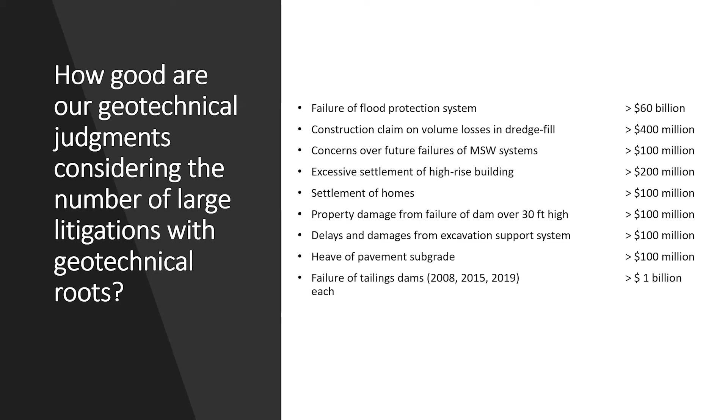And as part of all this is the whole question of big data, something we hear a lot about these days. Can big data potentially, together with these other tools, help us to get a better handle on our projects and reduce the chances or the odds that we're going to face some of these very challenging failures or failure to perform on our projects? So just quickly, big data, you all probably have heard about this.

77,000 hours of video, for example, generated every minute by Netflix to stream out to requests. Well, how does that map over to geotechnical engineering? I just quickly put down some of the sources of big data in geotech.

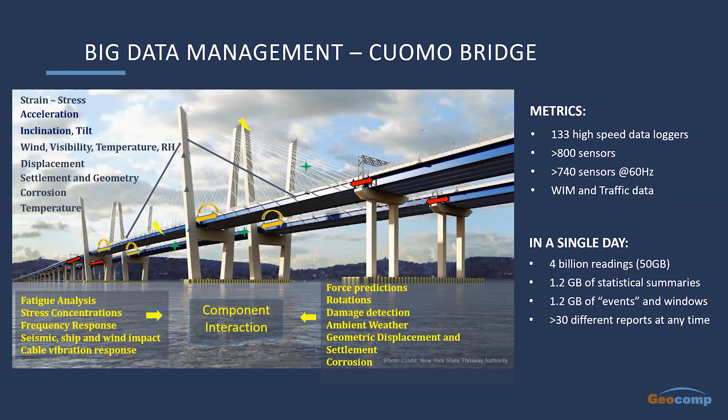That's an example of the challenges we face going into the future, and yet our ability to deliver highly valuable information — because in the end, all those bridge people see is just a few numbers on a screen every day telling them the bridge is working okay, and if there has been an event, they can dive down into it.

We might catch some of these, but unless we are programmed, or thinking, to take these into account as we develop these new tools, I fear we may add more problems and create more accidents than we solve. They might just turn into a different set of problems causing accidents.

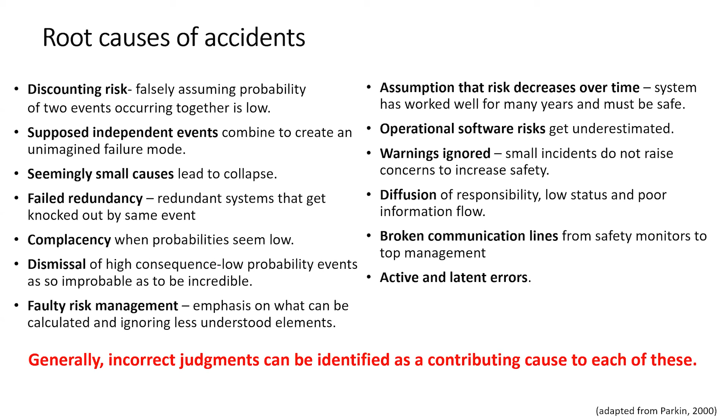But I want to warn those of you involved in developing and applying these tools: beware, question what you're seeing, question the quality of that information and the reality of what's being delivered to you. Generally, incorrect judgments — if you look at every item on this page, it has its roots in incorrect judgments being made as a contributing cause to each of these root causes of accidents.

I wrote some time ago about the process of geotechnical engineering, and it's really quite unique in that it requires us to use a lot of judgment. Even as we develop these tools, as Scott said, these are tools to help us better exercise our judgment. So judgment remains very important when we characterize the site, when we set up our model to do the analysis, when we come to designs, we make all kinds of decisions to simplify or make things that can be built and constructed.

And then as we observe the performance of the actual construction, again, we make lots of judgments about: is this performance okay? Are the surprises we're seeing still acceptable, or must we do something to tweak or modify the design? So this judgment role is really critical. It's still something we talk a lot about, but we're having a hard time really trying to quantify it and figure out how we improve on it. Until we can do that, it's going to be hard for us to do that with these new tools, in my view.

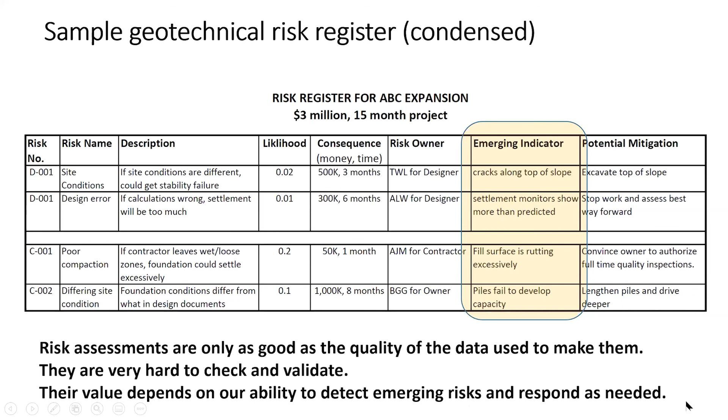These numbers in this format are very hard to check and validate. This is one of the shortcomings of risk assessment, but it doesn't stop us from going through the exercise of trying to anticipate what could go wrong in a project and being prepared to deal with it. So I'm hoping that some of these new tools will help us do a better job of understanding the project, understanding the uncertainties, and improving our estimates of likelihood and consequence. The value of these risk registers really depends on our ability to detect emerging risk early and respond as needed to avoid the bad event from actually coming to fruition.

So a caution on judgments: judgment and risk become, I'm sorry, I misspelled a word, even more important with all these new tools and big data. I think the push is on to move faster, to deal with a lot more information, to rush through things faster because we're all expensive, and we've got to be cautious. There are certain shortcomings that we as human beings have that I'm not sure are going to be overcome with bigger and better tools. We have difficulty thinking accurately in probabilistic terms, and we tend to underestimate consequences and make mistakes in using probability. This is proven through much research.

Forecasting is hard to get right. There are people in literature ever since we started writing talking about it. Forecasting is a fool's game. And yet that, as engineers, is what we do all the time. When we do a design, we're forecasting that we've done it right and it's going to work. But it doesn't always work that way. So again, we still need strategies in every case.

Even though we've got lots more data and very good quality data, we still need strategies to adjust to unexpected outcomes. We've got to remain very vigilant to safety issues, to checking our work, to the cultures that we're working in and how they're interpreting these tools and the conclusions and recommendations that we're coming up with, and then what quick actions are available to us to address any of these issues.

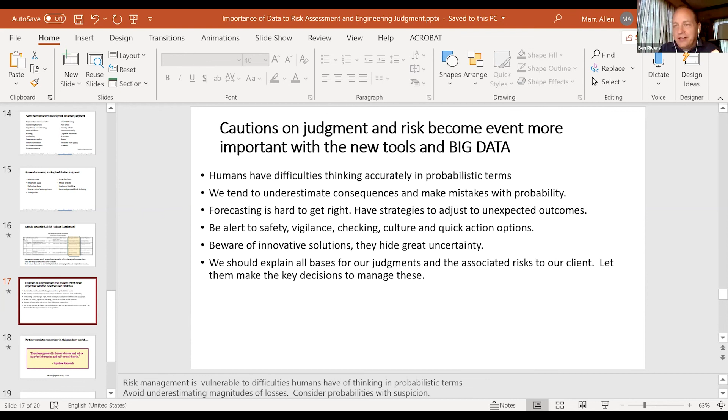One thought: I saw a number of points made about data quality and a question that came in on data quality where, obviously, DIGGS does not deal with data quality at all. It's an exchange, a transfer protocol. So with the idea of having this data available, we now need to have some type of confidence in that data to be able to use it and to put somebody's seal on it, as one of the questions came up. So I just want to open it up to every one of you on your thoughts on how to handle that aspect and how that's going to impact our work.

Vanessa, you're muted. Oh, sorry about that.

If I may, one of the first things you've got to take into account is it's the same question. How do I trust my boring log? I wasn't there. I didn't see the soil. I didn't handle it, right? We handle this in the same way. QA/QC procedures, make sure that you've got them. As far as the database goes, metadata, right? Who generated this data? Where did you get it? What time did you get it?

And then you need some static data so you can go back at any point and say, okay, let me just do a quick check. I'm gonna pick a certain percentage of my entries here and just make sure everything's fine. So when we're working on construction projects and a contractor is generating this stuff, just because they hand me a database, we're not done, right? I ask them for the raw data files so that we can compare them to the processed data that we get. We will often ask for hard copy PDFs of static data, so we can compare that to the database at the time, but we can also track it back later.